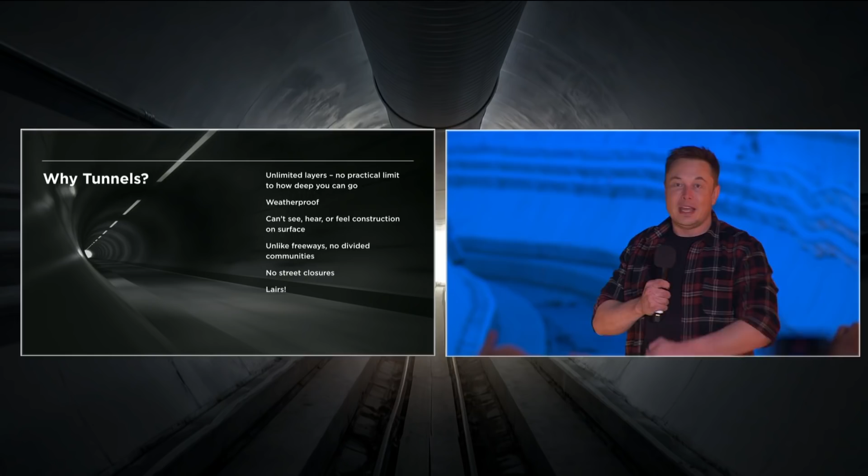So the thing is, why tunnels? Sometimes people say, what about flying cars and all these other things? And what about mass transit? I want to be clear, we're not opposed to mass transit, we think mass transit is fine. Let's try every solution possible. But the thing about tunnels is that you can go 3D underground. The inherent problem with the way cities are constructed is that you've got all these tall buildings in 3D and then a road network in 2D. And then everyone wants to go in and out of that 3D building at the same time. Necessarily, this will result in traffic. There's no way around it. You have to make transport 3D.

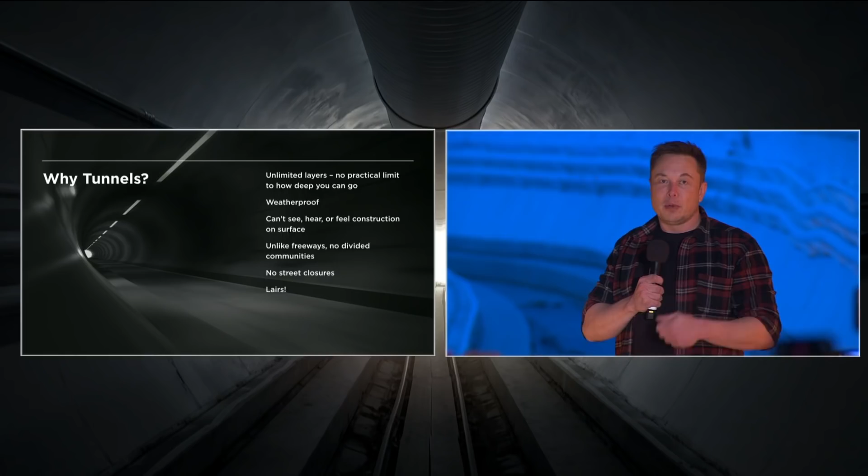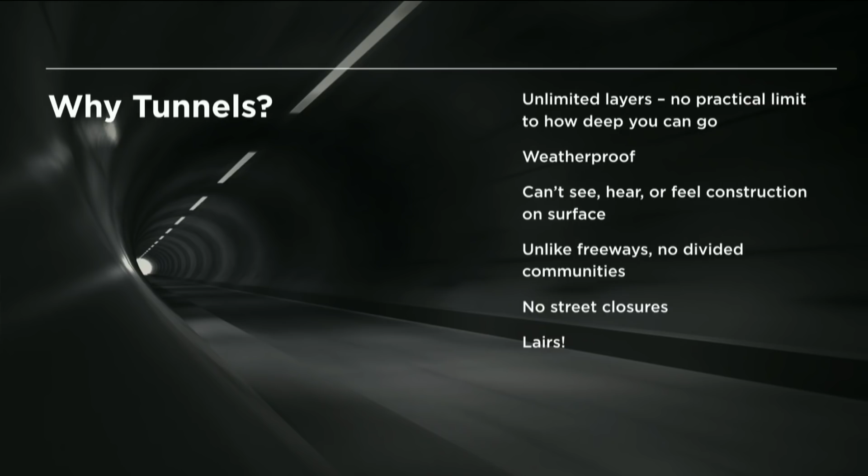You could go with a flying car, but there are some drawbacks to flying cars. They are essentially a helicopter with wheels. They make a lot of noise, there's a lot of wind force, and the probability of something falling on your head if there are a bunch of flying cars around is much higher than if there are not. But I think the great thing about tunnels is that there's no limit to how deep you can go. They're weatherproof, that's the other thing about flying cars - if there's snow or rain or hurricane, suddenly you can't go anywhere. But tunnels are immune to weather. It does not matter if there's a tornado, an ice storm, or what's going on above ground. If you're in a tunnel, you're safe and secure.

The other thing is you can't see, hear, or feel the construction. When you ride the tunnel, you'll see the entrance that's basically in the backyard of a house. The neighbor of that house, when the boring machine broke through the other side, was watching TV. The neighbor did not even stop watching TV - that's how subtle it was. So you will not hear, see, or feel the tunnels being created.

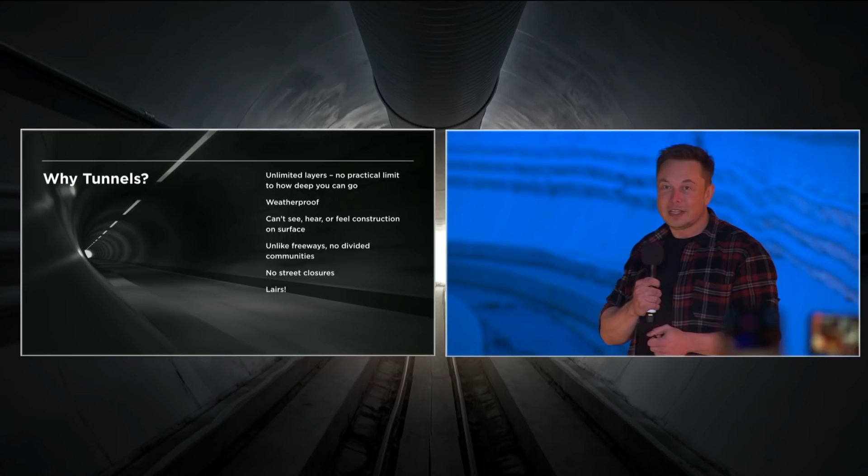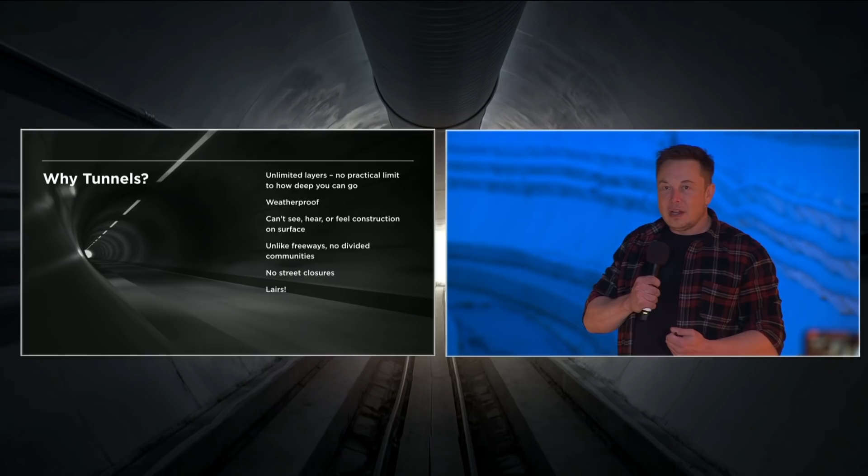Unlike freeways or any kind of surface transit, it will not divide communities. You don't have to basically railroad through communities. You can weave the boring system tunnel network into the fabric of a city without changing the character of the city. The city will still feel the same. You're not going to get in anyone's way or obstruct anyone's view. You'll have this revolutionary transport system, and your city will still feel like your city.

And lairs, of course - forgot to mention lairs, plural.

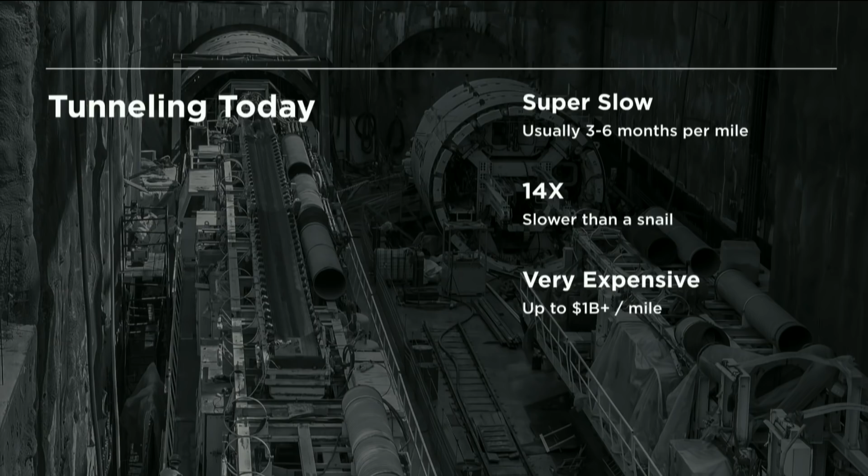So what's the problem with tunnels? They usually take a very long time to build, and they're very expensive. Typically, a tunnel will take 3 to 6 months per mile, and in some cases a year per mile. They can cost up to $1 billion per mile. In fact, the LA subway extension that just got completed cost $2 billion for 2.5 miles. There was a subway extension in New York that I think cost $2 billion for a mile. So clearly something needs to be done to revolutionize tunneling technology. We need to be able to build tunnels way faster and for a hell of a lot less money.

Just to characterize it, the fastest tunneling machine in the world right now is 14 times slower than a snail. So when I say we're going to have a tunneling machine that can do a mile a week, we're not talking about the sandworms of Dune here, okay? It's still slow, just faster than a snail - you will be able to escape it. All right, this is our snail. This is Gary the Sixth. Yeah, it turns out snails don't live that long, so this is Gary the Sixth.

But this is our goal. We must be faster than a snail. So what are we doing to increase the speed of tunneling?

As we got into it, we learned more and more about tunneling and why it takes a long time. First of all, in a given hour of tunneling, only about 10 minutes is spent actually digging. The other 50 minutes are spent erecting tunnel reinforcements, laying down tracks, doing logistics, and a bunch of other stuff. So just automating segment placement and solving the logistics issues will give you about a 5-fold increase in tunneling speed.

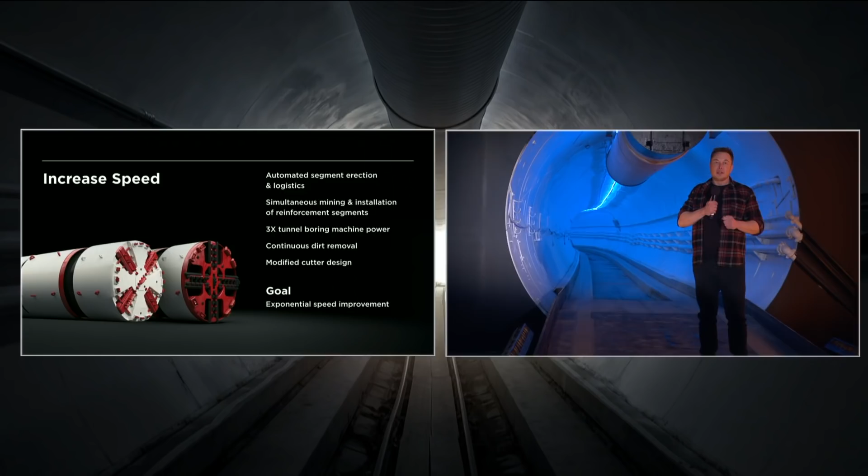The other thing that needs to happen is simultaneous drilling and tunnel reinforcing. You need to be able to drill and reinforce at the same time. Right now, old tunneling machines drill, stop, do a bunch of reinforcements, then drill, stop again. So the combination of automated segment placement and being able to drill while reinforcing is about a 5-fold increase in speed.

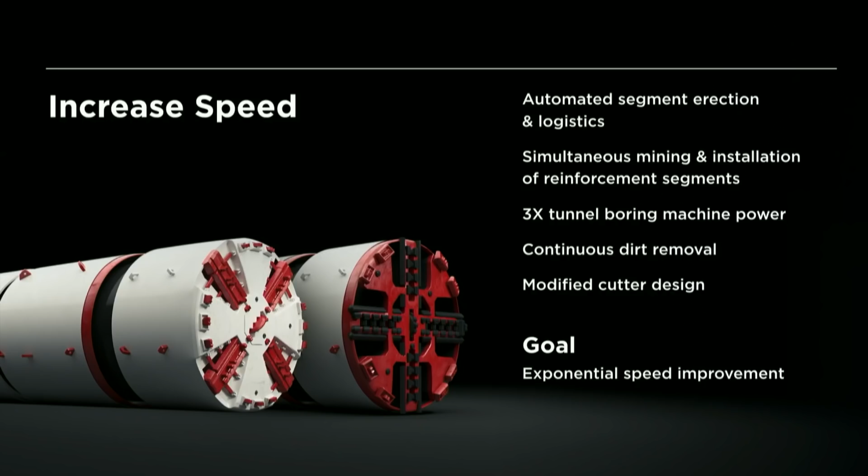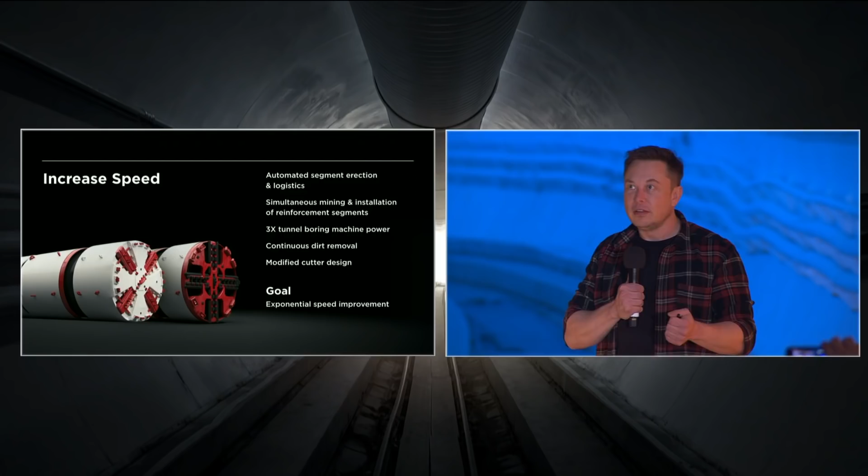Then with our design, we've also tripled the power of the drill, so it can drill 3 times faster. That results in a theoretical net speed increase of about 15x compared to the next best tunneling machine. So hopefully we'll beat our snail. Aspirationally, we should be slightly faster than a snail after doing those things.

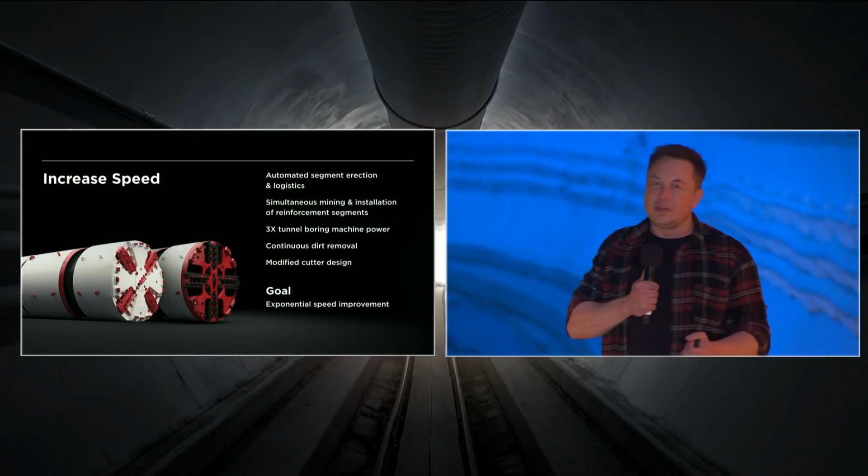And there's some other things. We've modified the cutter design. The dirt removal is continuous. There are 2 lanes instead of 1 lane. But we're very confident the engineering closes for achieving a 15x improvement, and we're actually building the machine that can do that right now.

And a few other things decrease the cost of on-site integration, meaning building the tunnel reinforcing segments on-site instead of having them built far away and trucked in, using the dirt we dig out of the tunnel to form the concrete for the reinforcing segments. So the steel reinforced concrete segments are 70% just dirt.

But amazingly, in other tunneling situations, they actually truck the dirt from the tunnel out and truck new dirt in, which makes no sense. So we just use the dirt from the tunnel, add some cement and some steel, and create these reinforcing segments on site. A lot of these things are really quite elementary, but are not done.

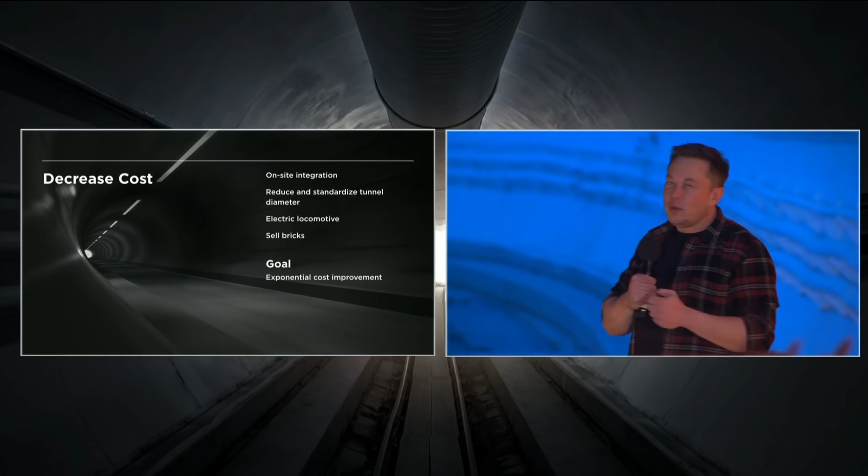Then we're having a narrower tunnel diameter, not a gigantic tunnel, but just one that's sort of right-sized for vehicles, which is also important.

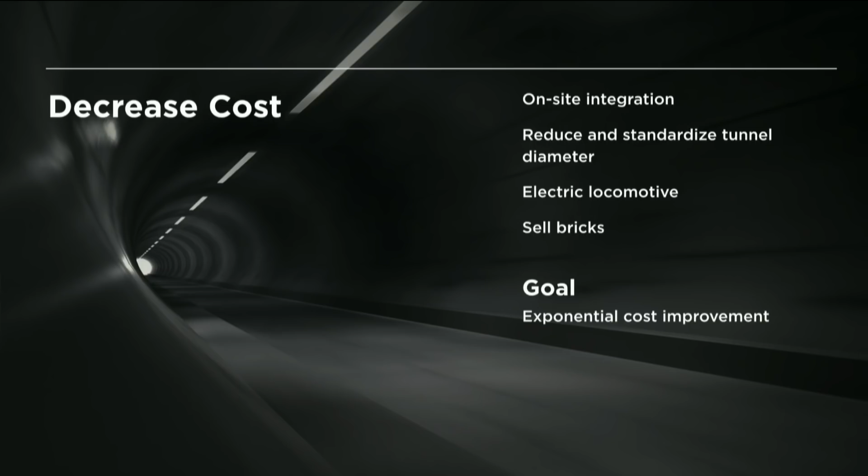We developed an electric locomotive, of course. It seems obvious, but other tunneling efforts use diesel locomotives, which is problematic in a tunnel because it absorbs all the oxygen and emits noxious gas. This is an obvious thing to make electric.

And then selling bricks, I'll get more into that. About 15% of tunneling cost is just trucking the dirt out. So we thought, what can we do on site to alleviate that dirt cost? We're just making bricks out of the dirt from the tunnel and then selling the bricks. We should be able to completely get rid of the dirt removal cost. Depending on how many bricks we sell, the tunnel could actually pay for itself with just bricks.

So we'll be selling bricks at 10 cents a brick, which is less than Home Depot, which I'm told is 25 cents a brick. So get your discount bricks here. It's going to be great. And if anyone shows up who needs bricks for affordable housing, it's free.

We're going to do all sorts of brick kits with bricks that fit into each other, like giant-sized Lego kits. You'll be able to build all sorts of things with bricks.

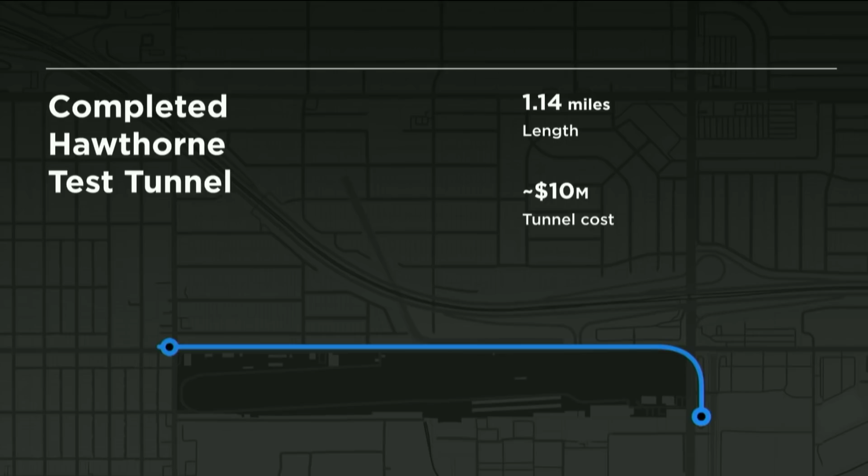Normally, tunnels cost up to $1 billion. A discount tunnel would be sort of $200 million. But we're able to build this tunnel for about $10 million.

I think this is a very important proof of concept for the technology. Building a tunnel, LA is like the tunnel equivalent of Broadway. We've got earthquakes, we've got oil and gas and methane in the soil. They still drill oil in LA. And you've got sandy, rocky soil. There's about a million regulatory agencies you have to satisfy. Essentially, if you can tunnel here, you can tunnel anywhere.

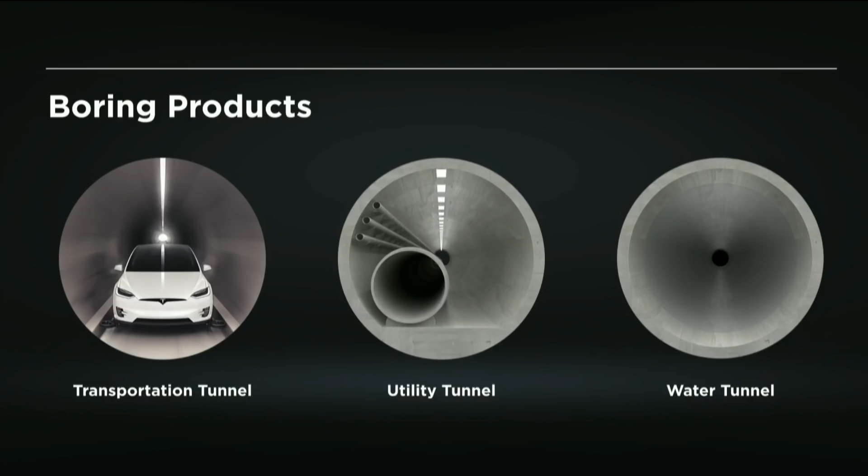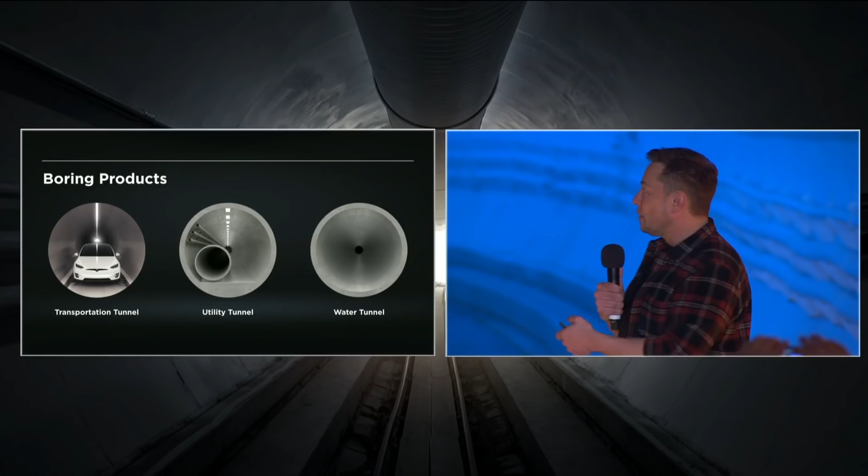We have three tunnel products. One is the loop, for transportation pods, which you guys will try out later today, and that's a transport tunnel. We're also seeing a lot of interest in utility tunnels, where a municipality can get a big tunnel and put water mains and electricity lines inside it. Then if they had a water main break, instead of it flooding the main street, they can go into the boring company tunnel and fix it. So it saves cities a lot of grief. And then there's just transport of water and sewage and stuff.

Yeah, we just dig holes in the ground.

So the loop consists of autonomous electric vehicles combined with deployable guide wheels, so it braces itself against the side of the tunnel to stay safe, even if the car loses power, someone goes crazy, or there's a mechanical failure. Those guide wheels keep the car centered in the tunnel and ensure you can go through very fast and still be safe.

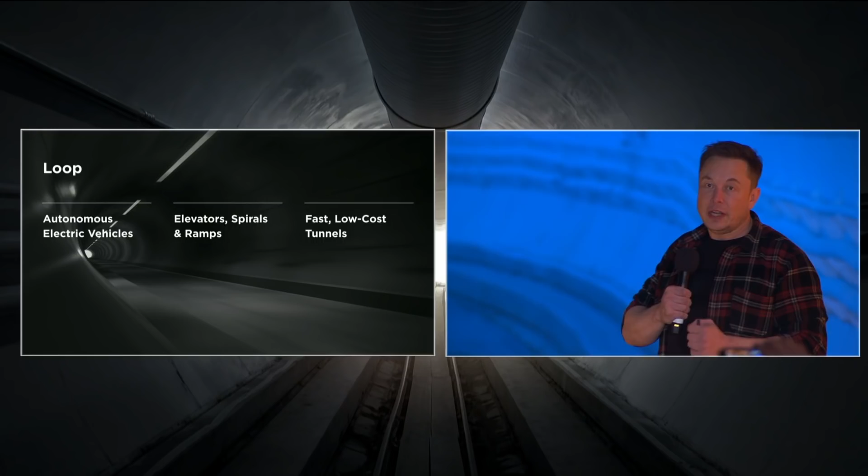In terms of stations, the intent is to have many more stations than a subway, at least 10 or 20 times more. This is important because you can intersperse stations throughout the city and not dump a ton of traffic in one location. By having many stations, people get closer to their destination, and you don't disrupt the traffic pattern around where the loop exits.

Depending on how much room you have, you can have an elevator that only takes up a few parking spaces, or a spiral ramp, or a long ramp. Combine that with fast, low-cost tunnels, and you've got a very exciting transport solution.

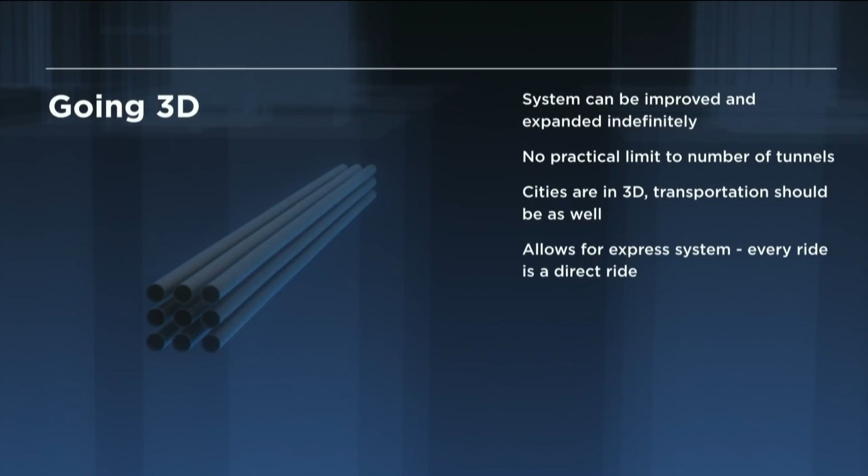Now, the thing about going 3D is you can just keep expanding the number of tunnels. One question we're often asked is: sure, if you build this tunnel, people will use it, it'll get full, and we're back to where we started—like adding a lane on the freeway. You add the lane, but traffic expands to fill the available volume. But the thing about going 3D is you could have 16 tunnels going in the same direction. You can have as many tunnels as you want.

I'm pretty sure everyone in the United States is not going to move to LA, but you could literally build enough tunnels to transport everyone in the United States in LA. There is no limit—this is very important. The system can be improved and expanded indefinitely. It's really about making transport 3D.

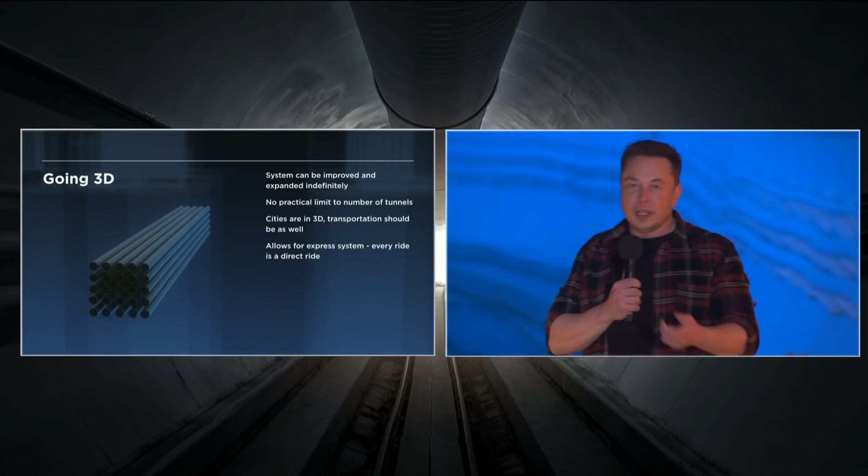The way it works, there'll be a main artery for the tunnel traveling at 150 miles an hour—kind of like an underground highway. If you think of how a subway works, it's like a bunch of stop streets, you keep stopping, so the average speed on a subway, including stops, is typically about 10 miles an hour. But the loop would have main arteries traveling at 150 miles an hour.

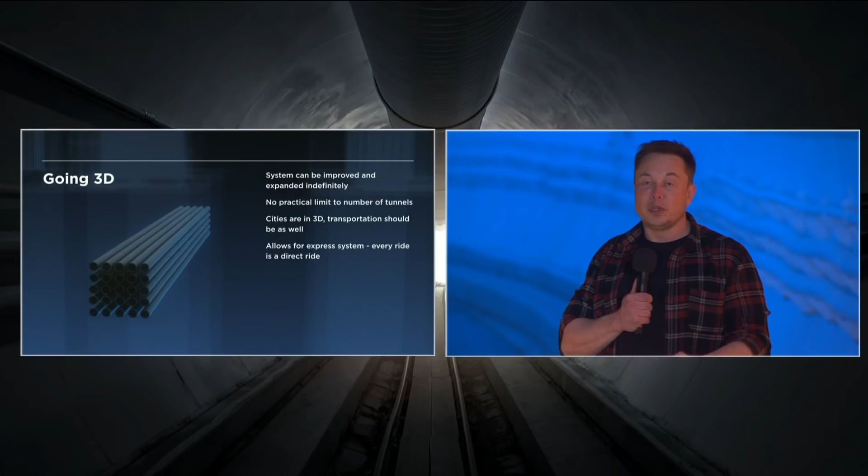Only when you want to go to an exit would you have an off-ramp. So you can travel the vast majority of your journey without stopping, at 150 miles an hour, and only slow down when you get to your exit, then automatically transfer from one tunnel to another. It's like a 3D highway system underground, basically.

So that's the actual thing you will experience tonight.

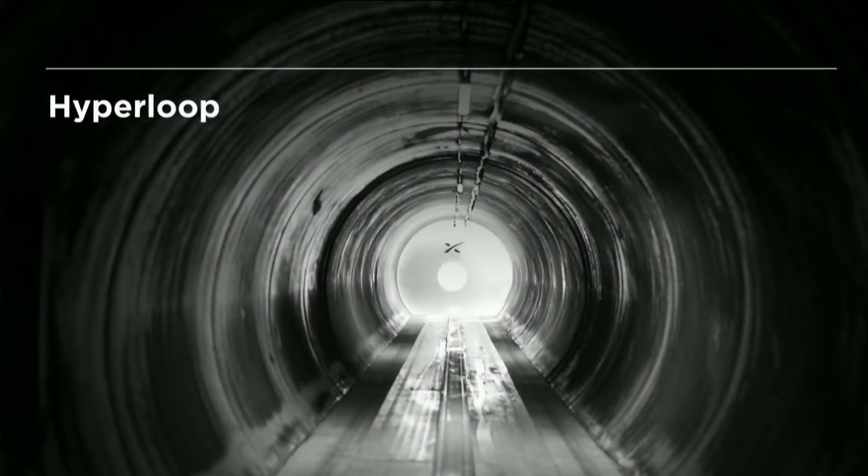And then one day it will connect to the Hyperloop - but that's for another time. What I think this really amounts to is an actual solution to the soul-crushing burden of traffic. This is something that I think will actually work. It's scalable, and we have a demonstration tunnel here, and we expect to expand this over time to many cities all around the world, and give people more time for their friends and family.